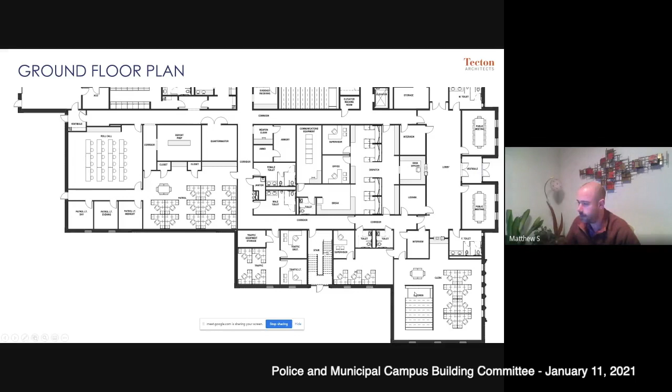Some of the changes we did involved reorganizing spaces that were a little bit chopped up. The clerk's office was kind of pieced together, and records was off to the side, taking up some of the exterior wall space, which led to an inefficient internal flow. So we reorganized that a little bit.

As well as the 311 call center and dispatch area, we combined the two offices to be more of a single block, and moved the communications equipment room closer to the dispatcher's desks. Previously it had been back here in the corner. We relocated it so it was closer to dispatch, meaning less of a run for all the cabling and things that need to happen in here. It also makes for less complicated construction because we're going to be depressing the slab through this area and doing raised access flooring, so that modifications can be made much easier during future years of occupancy of this space. The further remote we have it, the more complicated that construction and the ability to change becomes. So we brought that closer around.

Same thing with patrol. We reorganized the space a little bit more, moved report prep closer to the hallway, and that allowed us to have a cleaner organization of some of the patrol desks.

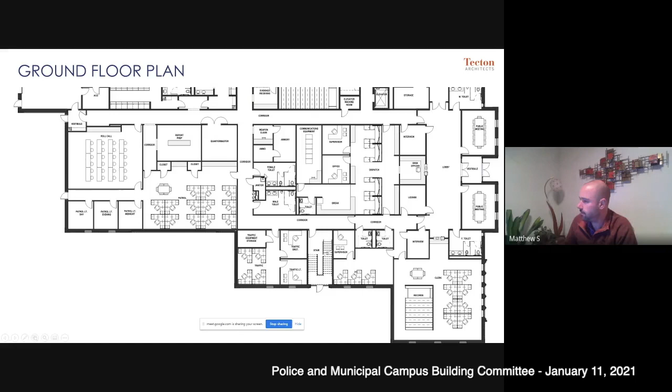Moving up to the north part of the plan, some of this is still being worked out, but I'm going to work back to front.

We were working with our engineers and identified some of the MEP related spaces that need to be on the ground floor and accessible on an exterior wall. Some of that is the water service coming in for the sprinkler room, the electrical, and emergency electric. We anticipate that somewhere along the northwest of the building is probably going to be the best fit for the generator, so we want to make sure those runs from the generator to the emergency electrical room are really short, because those secondary feeds are really expensive. We want to keep that run as short as we can.

One change we're going to be working through is in reorganizing this area, we pushed the ACO back here. There was a desire early on to have exterior access for the ACO because of some of the materials they'll be bringing in and out, not wanting to bring them through the rest of the building. So we're going to shift a lot of these rooms around so we can get it back to the exterior.

The cell area we reorganized a little bit as well. Previously the male cells were facing each other, which we don't really like because it becomes difficult to have sight-sound separation between those across a hall from each other. So we moved them to more of a linear block here in the south portion of the cell area. We also moved the juvenile cell and the female cells down to this portion of the building. Previously they were up above in bail, and prisoner release was down low.

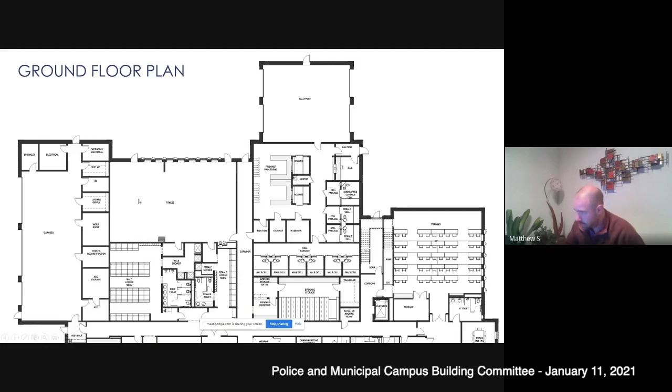That could take you offline for a couple of days as repairs go on. Those kinds of things are inevitable—water can move throughout a building when there's a leak—but we're going to do whatever we can to mitigate that as best as possible.

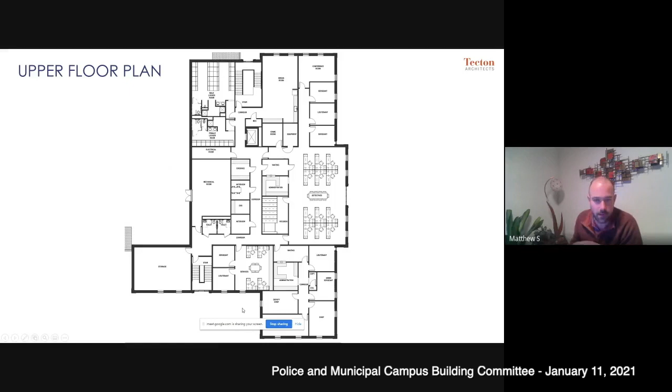What this boils down to at the end of the day is the floor plan and overall form of the building hasn't really changed, other than we were able to shrink the Sally Port area down a bit. We haven't lost any program with this—we've just made things more efficient, resulting in a net savings of about 2,500 square feet out of the building area.

Every square foot we save is dollars that we're building into our contingency. So right off the bat, before we bring the CM on board, we've already reduced the overall cost of the building. The initial estimate was somewhere around $450 a square foot, so over 2,500 square feet, that's a good buffer we're building in just in schematic design alone.

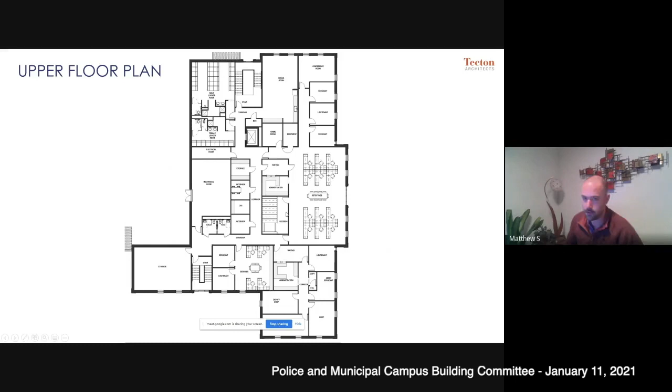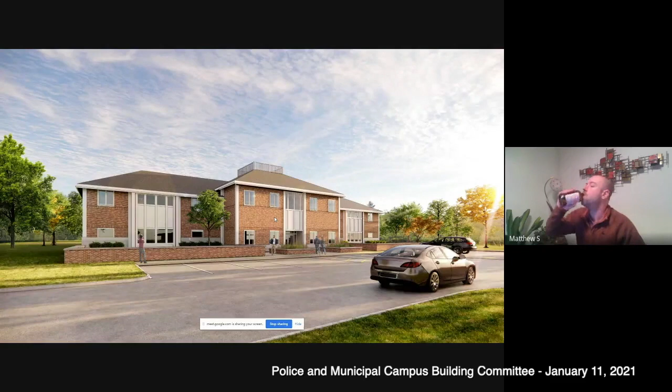But we wanted to take it a little further and explore various options, because we have until design development to really make modifications to the building facade, and we can continue making those up until we issue this for bid.

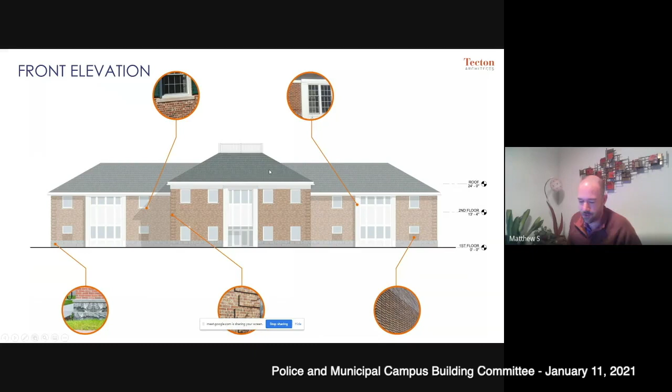But we wanted to explore other options and opportunities and just sort of take the temperature of the room and see where you guys felt on it.

So one other option we were looking at is making small moves that have a significant impact on the building. I'll note that here we're not showing the mass reduced at the sally port, but it is in reality lower. You'll see that at the next iteration.

I'd point out that this elevation to the front of the building is set back another 60 feet. So between the perspective of that out on the site in reality and some of the landscaping we'll be able to work into this, that'll fade back and be less prominent than it shows in the elevation. But in this, we were looking at punching out some building elements with some of the windows.

So we were bringing in some brick surrounds that we would add in with some different brick detailing to define these bays a little bit more and add some vertical expression to the facade. And then we were looking at maybe integrating some precast concrete surrounds at the front entry, just ways to bring some different materials and different detailing in here to give that next layer of depth to the facade. And then that plays itself around to the rest of the building.

One thing we'll note, I think we initially were showing some windows down here at the north elevation of the training room. Since that's becoming our presenting wall, we're taking the windows away from there because they're going to conflict with that presenting wall. But since we're going to have a taller ceiling space in there because we're stepping down, we may bring in some clerestory windows up above that. We're still working through that currently.

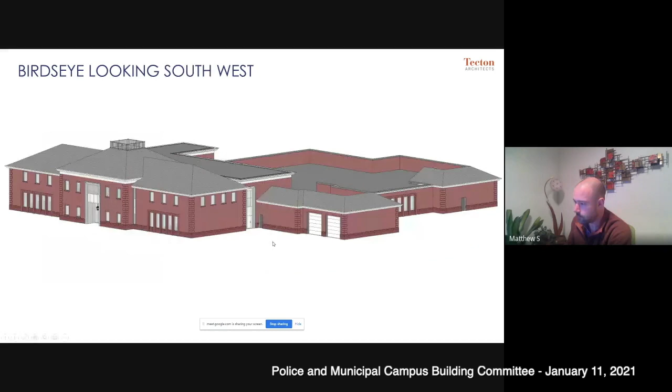So we then looked at another option. We weren't really feeling the precast — it seemed out of place as that big open surround — but we liked bringing in an element that gave a border and landed the windows so they weren't just floating out in space. So we took that same articulation we were showing on the previous one that stopped at the floor line, and we brought that up to encapsulate that whole window bay. It gives the facade a little more verticality and a little more depth.

And then taking that stacked bond brick that we had shown underneath the windowsills previously, we used that in between the two levels of windows so that they all become sort of a unit. And instead of the precast surround at the main entry, we were looking at this also being layers of brick — so it would be another brick definition.

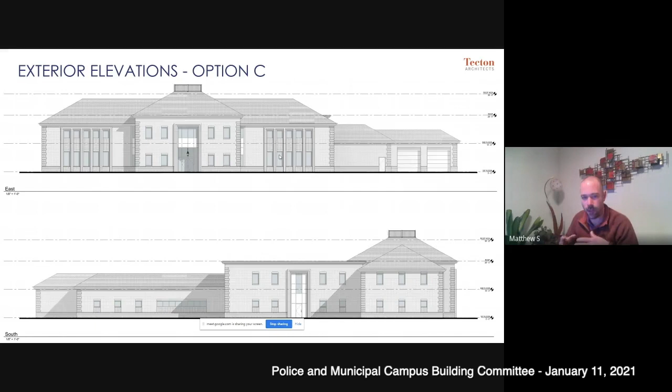There isn't really precast on the campus currently, so we felt that if we were going to play with articulation, the brick seemed to be the appropriate move for that. That way, instead of playing with different materials that may or may not work, we're playing with lines, depth, and recess.

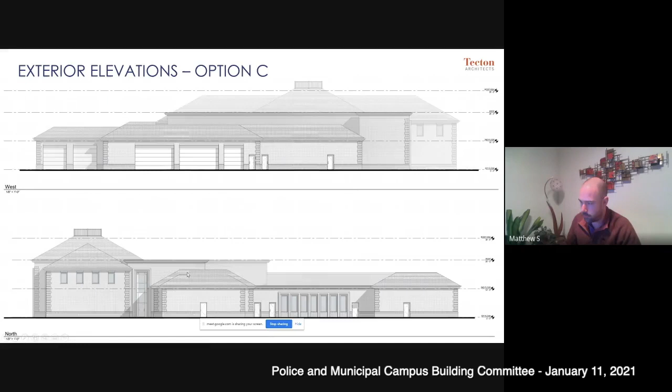And again, taking this element around the rest of the building with the brick quoins. And here you can see where we're stepping down that sally port roof line, and again in axon.

And then we did a rendering of what that would look like in elevation, so you got a better feel of the materiality of that. When you look at it in the flat elevations, some of the elements appear a little punchier than they really are. This gives you a sense of how those shadow lines start to interact and how the materials are consistent, but by playing with the depths, we're able to break up the facade a little bit and give a little more definition to it.

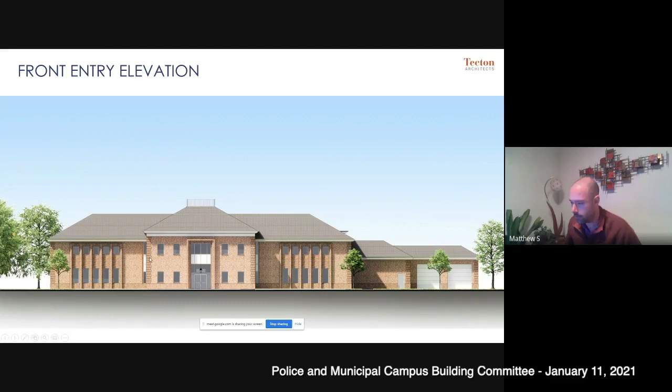Just real quick before we open it up, next steps over the month of January: we'll continue to work through some of these details. We'll take your comments tonight. This isn't final, just ideas to bounce off you. We're doing weekly targeted meetings between my design team and the town. This Thursday we start talking about building systems. We'll provide a summary back to the committee at the next meeting on the major decisions and direction. We're pushing through schematic design and kicking off design development by early February at the latest. Once we lock these decisions down, we'll move into developing the finite details, and as Kevin discussed, progress through the CM selection process, onboarding the CM pending OIG approval of our application.

That's it. Thanks, Matt. Any questions out there? A lot of information, as always. Yeah.

I appreciate what you did with the Sallyport. I know logistically it's difficult since it has to be in a certain location, but I appreciate that you worked on decreasing the mass, and by my calculations that's a little over $1 million more in reserve that we have. Excellent, thank you for that. And I think it looks better too, it brings down the mass a little bit.